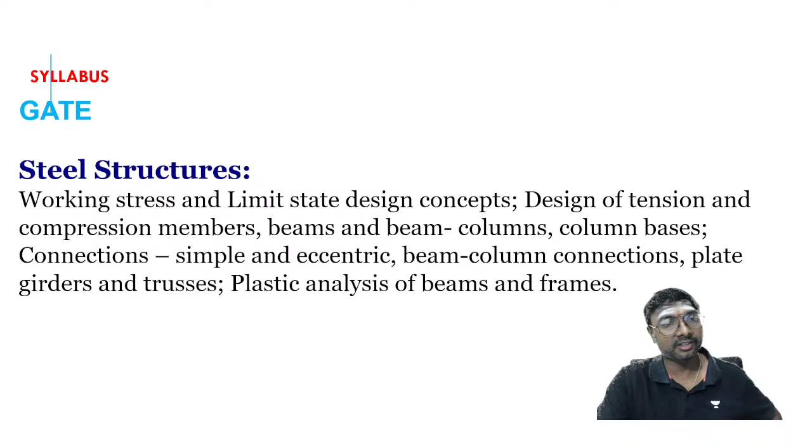This is the syllabus for GATE steel structures, this is the syllabus for ESE steel structures, and these are all the topics we will be discussing: basics of steel design, design of connections, concentric and eccentric, riveted, bolted and welded connections, type 1 and type 2 connections, tension members, compression members, built up columns, column bases, column splices, beams, plate girder design, gantry girder, roof truss. All these topics I'll be discussing here, but in a quick manner we'll be completing them.

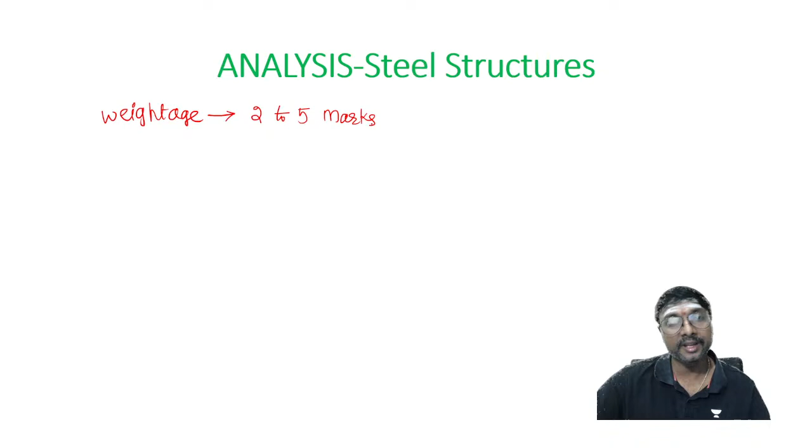So before we go further, what is the weightage of steel structures? If you observe, the minimum number of marks from steel structures in GATE till now is 2, and the highest is 5. So you will be getting 2 to 5 marks from steel structures in the GATE examination. Now ESE, what is that?

You will be getting 9 to 13 questions from ESE. Yes, 9 to 13 questions you will be getting in ESE. You can write: 9 to 13 questions you will be getting in ESE.

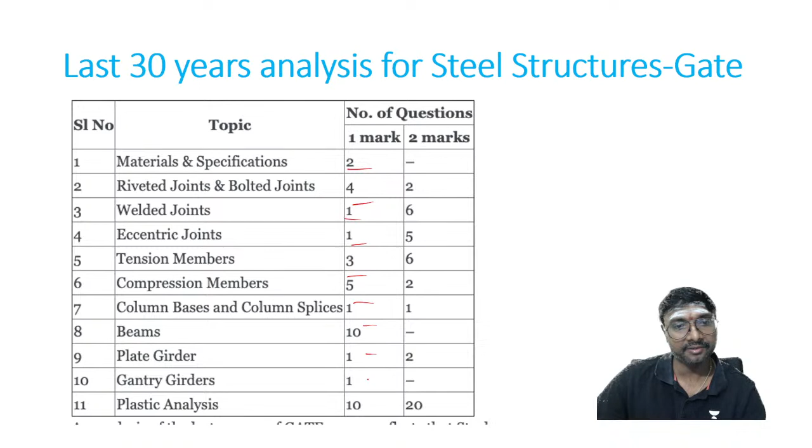So these are the distributions we are having - materials, riveted and bolted joints, welded connections, eccentric joints - these are the weightages if you observe, from each and every topic in the last 30 years of your GATE examination. Now coming to this, shall we start the first chapter?

So you can make notes of it, right? So that for quick revision point of view, these are useful. Whenever you are revising just before the examination, these notes will be useful - it's like short notes, useful as quick revision notes.

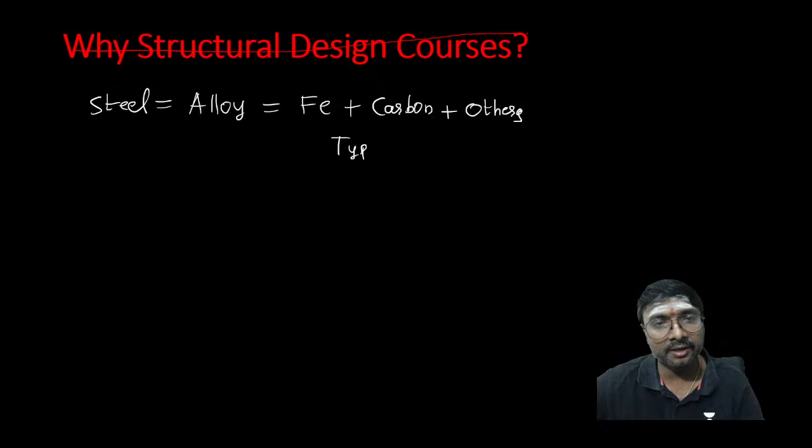First one is reinforcing steel. So what is the meaning of this reinforcing steel? Second one is structural steel.

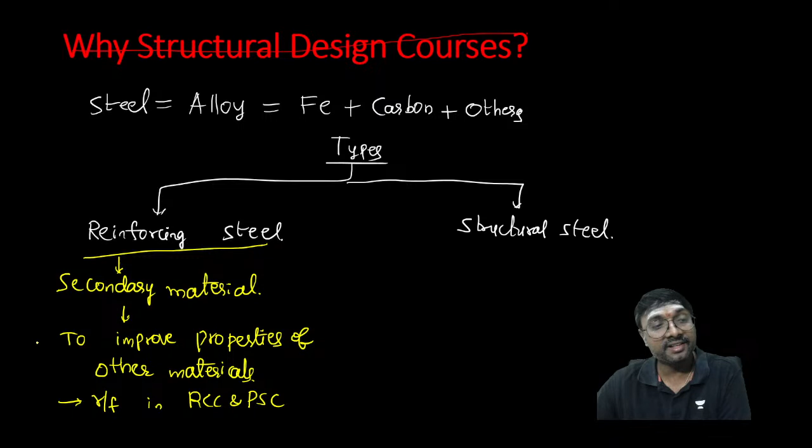In case of RCC and PSC, is steel the main material or is steel a secondary material? Steel is a secondary material, yes or no? Structural steel means - so there in RCC, concrete is the main material.

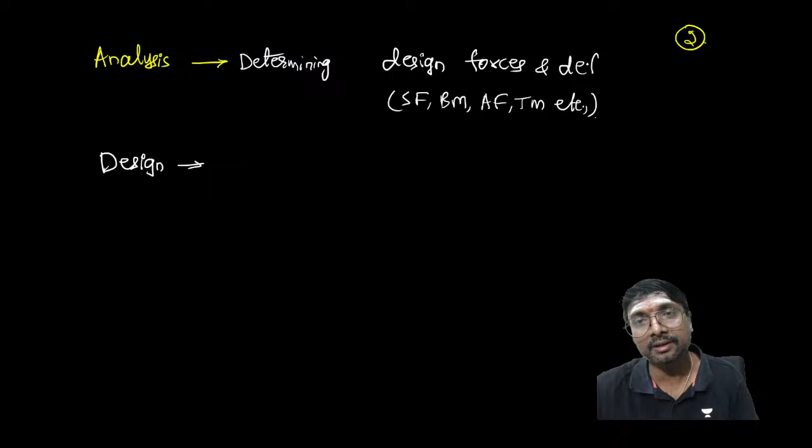Design forces क्या है? Analysis means whenever you are calculating shear force and also deflections - determining design forces and deformations. Which deformations? Deflection, rotation - all these are deformations only, and rotations are also the deformations only.

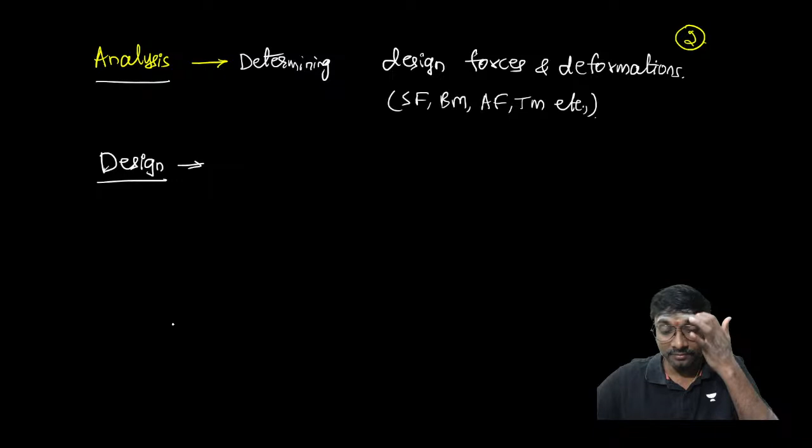Now what is the meaning of this design? Tell me, anyone? Analysis, you know, is calculation of this design forces, right? What is the meaning of this design then?

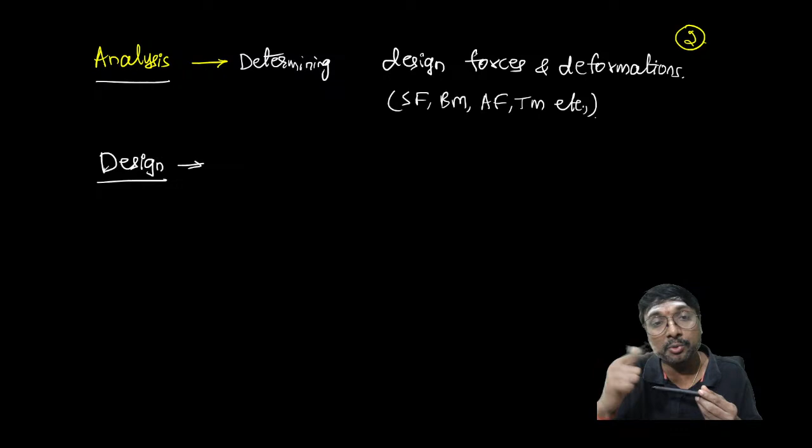So whenever you are applying a bending moment on this structure, it has to resist this bending moment. Which property will resist this bending moment? Material property will resist, and geometry property also will resist. So what is the meaning of this design, everyone?

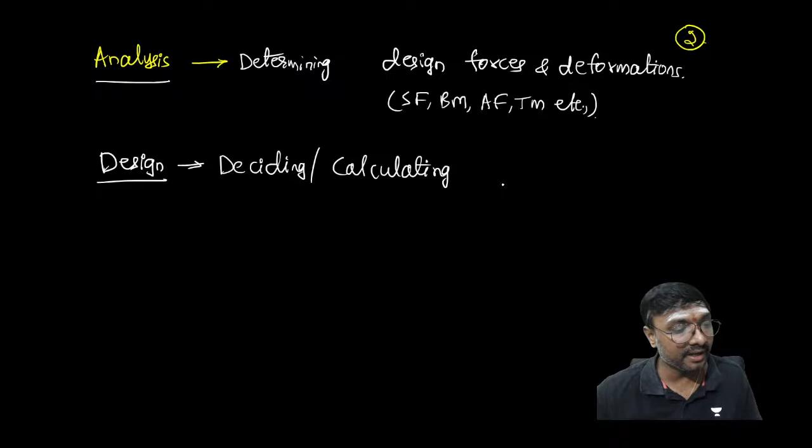Deciding, or calculating - deciding the material and geometry properties. Material properties we have to decide, and geometry properties also we have to decide. What is the width, what is the depth, what is the shape?

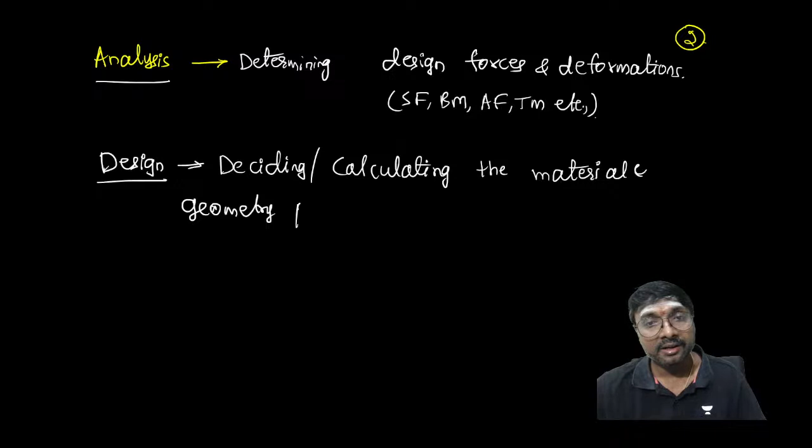Material properties for which purpose? What is the main purpose? To resist the design forces only - it is to resist the design forces only, if you just observe. Got it now? The difference between the analysis and the design, you understood everyone?

So means material grade - what is the meaning of this material grade? We have to decide. If it is RCC, M20, M30, like that. If it is steel, which type of steel we are deciding - FE 410 grade, FE 510, FE 500 grade, like that, FE 800, like that.

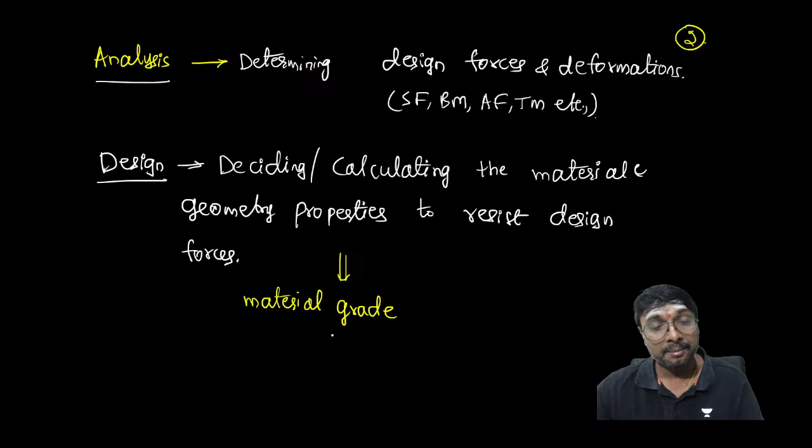Material grade plus what else will we be discussing? Shape of cross section also will decide now. Shape of cross section plus geometry - what is the meaning of this geometry? Dimensions - geometry is nothing but your dimensions. These are all, if you are deciding, that is called design.

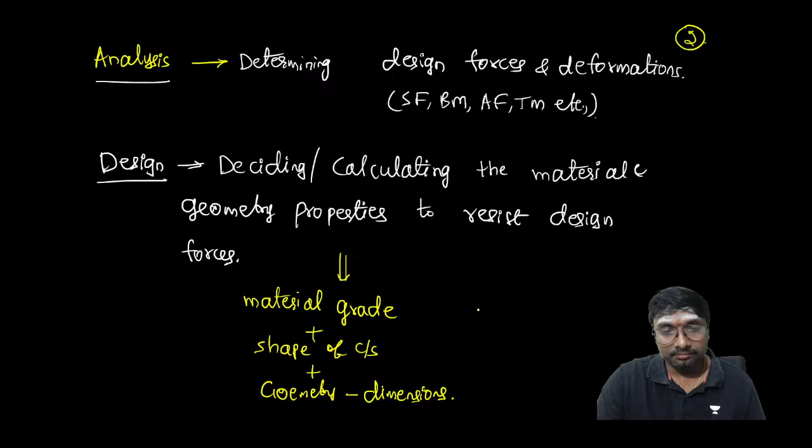Right, so now we'll be going on to this one. Generally, if you are representing the steel nomenclature, how will you represent it? This nomenclature is very, very important. Nomenclature means what? A representation. Suppose if it is a reinforcing steel...

Whenever it is a reinforcing steel, for example Fe250, what is the meaning of this Fe250? Tell me, what is that 250 telling? Here that 250 is telling - this is a yield stress. It is representing the yield or elastic strength.

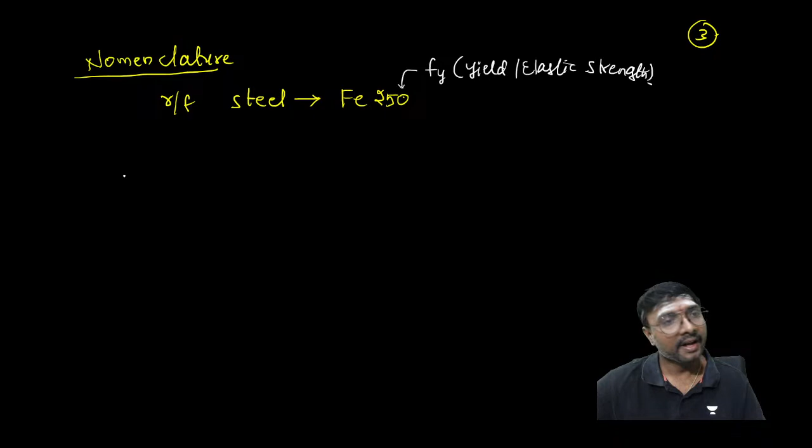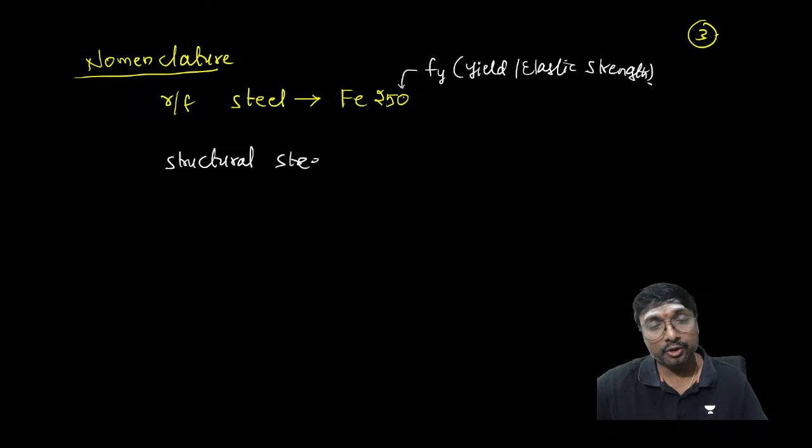Yield or elastic strength? Whenever it is structural steel, we are interested in this elastic steel or reinforcing steel? We should be studying about structural steel or reinforcing steel, whenever it is mentioned as Fe410. What is it considered when we mention it as Fe410, like Fe410 E250? E250 or E240 is mentioned like this. What can you understand from that? This 410 will be representing what?

Yield strength or ultimate strength? If 410 represents which one? This is ultimate strength Fu, ultimate tensile strength, UTS, right? And what is this 250 representing? That is representing Fy. Got it now? The nomenclature or representation of structural steel and reinforcing steel, is it clear to all of you?

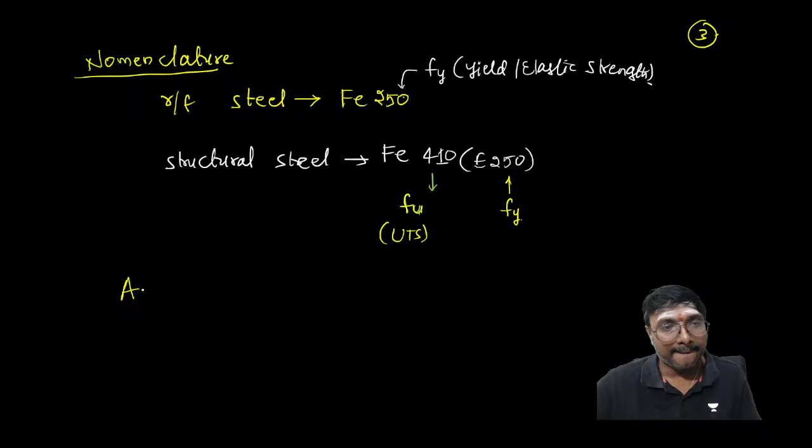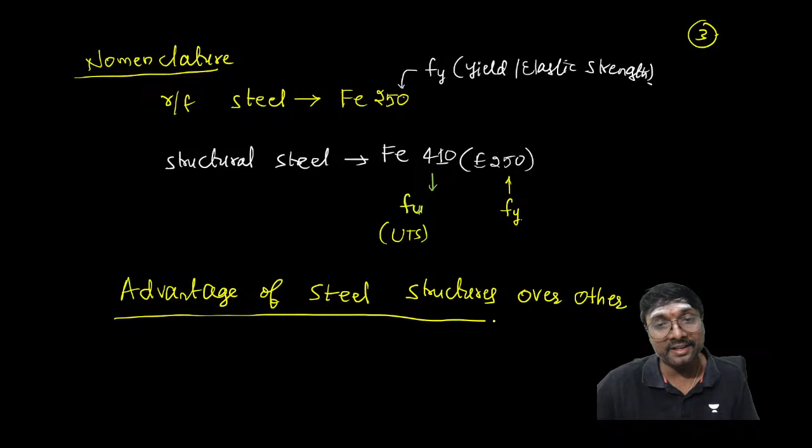Clear, all of you? No? Why do we have to go for steel structure first of all? The first and foremost advantage of steel structures over which one? Other, what is the meaning of this 'other'? You can say reinforced concrete structures and wooden structures and all these structures. Now if you consider, what are the main advantages? Anyone tell me, what is the first and foremost advantage of this?

Compared to concrete, these steel structures will show high strength or less strength? Compared to concrete, will steel structures show high strength or less strength? Very high strength they will show. If you consider these dimensions, for the same dimensions, who will show more strength? Steel structure will show more strength or concrete structure will show more strength?

E250 will be given, Fe410 E250 will be given. So in bracket E250, that is the nomenclature representation actually. Or directly what they will do is just simply represent it as Fe410 only. So then you have to take it as which one? This Fu, that Fu will be ultimate tensile strength. This is the actual nomenclature. If you observe the codal provisions, then you can understand this is the actual nomenclature you are having.

Got it? Now, first and foremost advantage is very high strength. What is the meaning of very high strength? Even for smaller dimension, you will be getting larger strength. Second advantage is more strength by weight ratio. So what is that strength by weight ratio? If you just observe, strength by weight is nothing but economy checking only, output by input checking. What is that output?

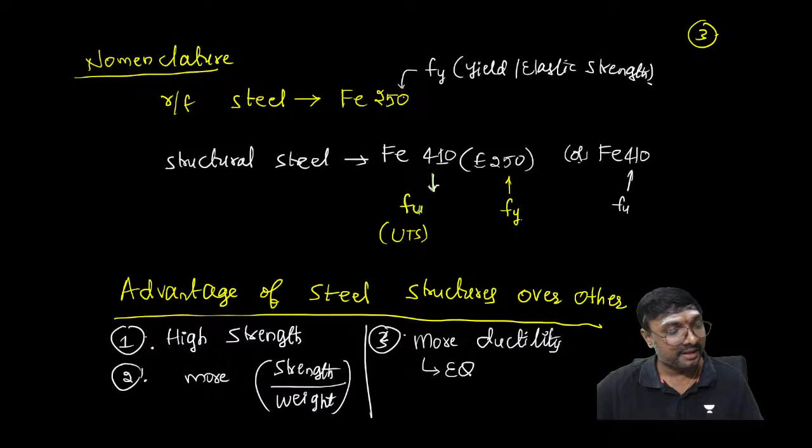So what is the next advantage of steel structure, everyone? I'll try to write here itself. So what are the other advantages? The next third advantage is what? More ductility will be there. What is the advantage of more ductility? In case of your earthquake, earthquake resistance, this ductility is a very important criteria.

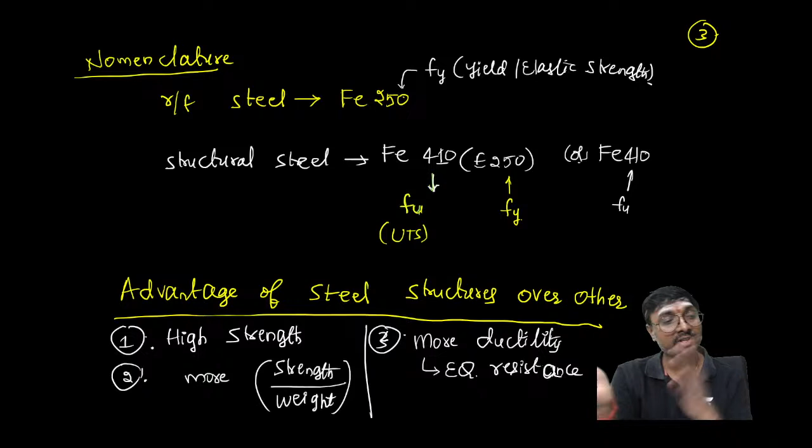More ductility you are having means more earthquake resistance will be available, because if structures are subjected to vibration like this, if they suddenly fail without much deformation like a brittle material, it is not advantageous, it is not required in case of earthquake. But during this vibration, it should not fail or break suddenly, it should show more amount of ductility, it should deform only. So whenever the earthquake starts, people can vacate from the structure easily, they will find some time.

Which one is better? Tell me now. Ductile material is better in case of earthquakes, or brittle material is better? Which one is better? Obviously, ductile material is better. Is it clear?

Now what is another advantage? Generally if you go for concrete construction, it will take a lot of time, almost 6 months. But steel is very ductile. Whenever it is a ductile material, what will happen? Steel will take less time of construction, right? Fast construction.

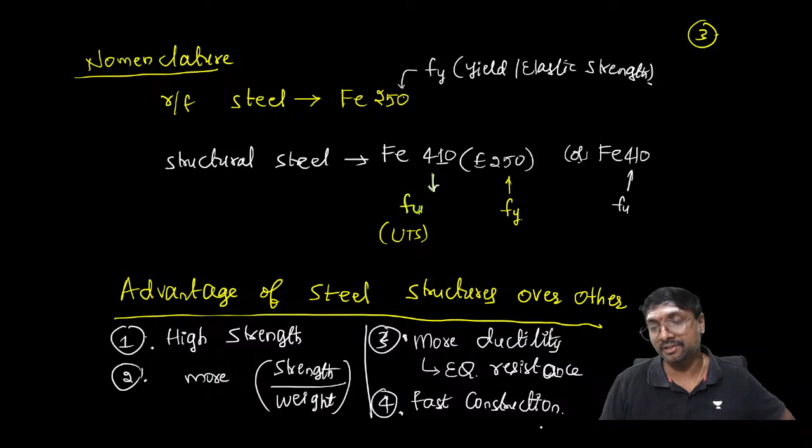Just within 1 week, within 1 month also we can complete the construction. Fast construction, right? So is it clear, everyone? These are the 4 points for advantages.

Is this clear, everyone? No. So next advantage, right? What is the next advantage?

Long life. If you just observe, what is the meaning of long life? Longer life means these steel structures will stay for more amount of time. Your children, your grandchildren also can stay in that, right? So what is the second point?

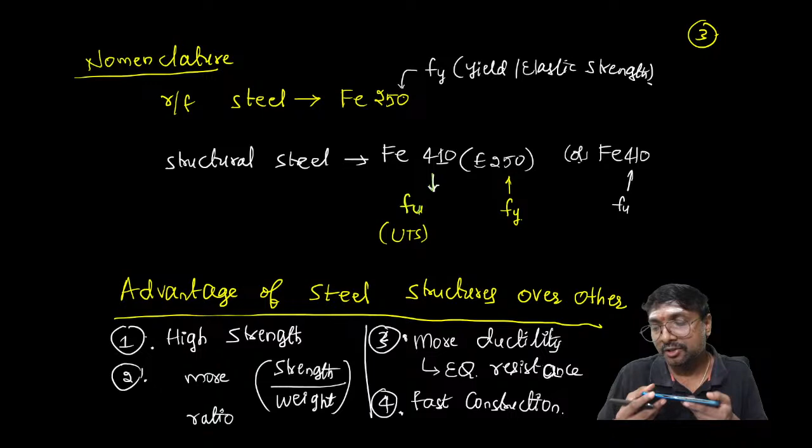More strength by weight ratio, right? Strength by weight ratio is nothing but, for lesser weight of the structure itself, you will get more strength. I told you, lesser weight means lesser dimensions. For lesser dimensions of the structure, lesser weight. For lesser weight itself, the load resisting capacity will be higher, right? Got it now, Shruti?

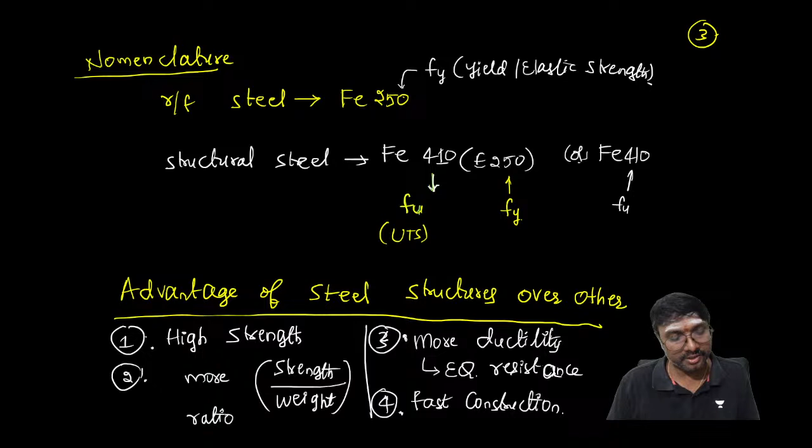Any other doubts anywhere in these points? Anyone else? Anyone having any other doubts? Clear now? Clear now or not? Right, okay, shall I move?

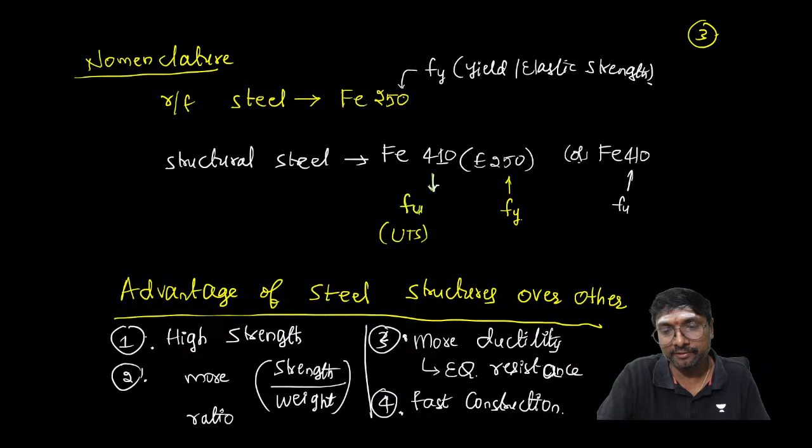Now sixth point. What is the sixth advantage? If you just observe, elasticity, right? More elasticity available. And more uniformity is also available, na? More elasticity and uniformity is available, right? What is the meaning of this elasticity?

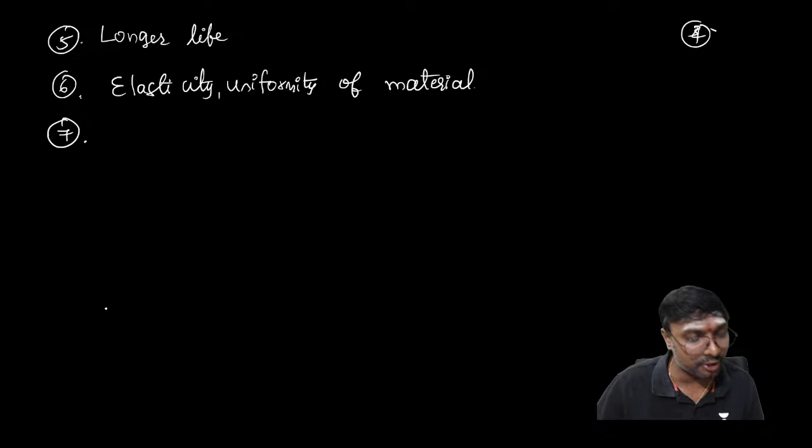What is the meaning of elasticity? It is a property of material by which it can regain the original shape and size after the removal of loads. Uniformity of material, right, means it will show homogeneous behavior, not non-homogeneous behavior. Now what is another advantage you can say?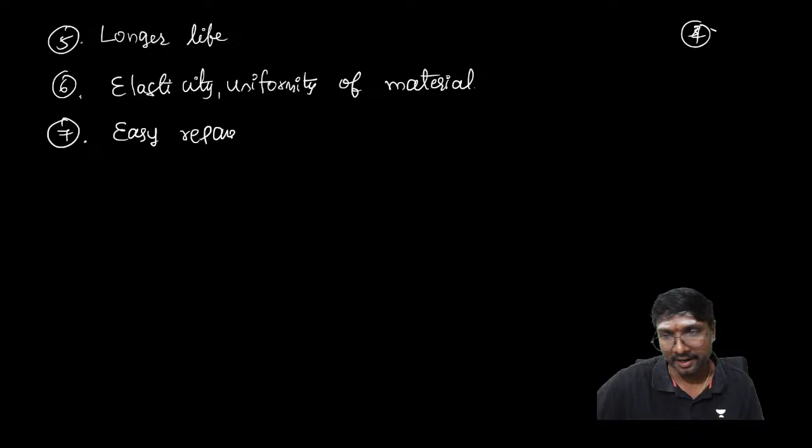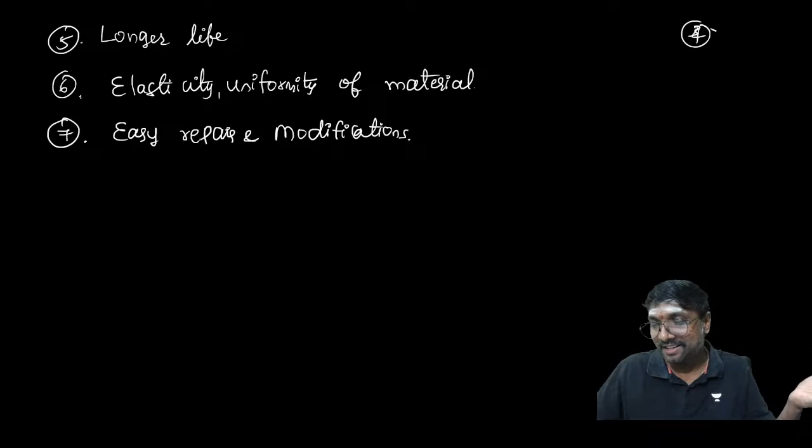Easy to repair, right? Easy repair and modifications. Suppose in case of concrete, a beam got damaged. Now if you wanted to replace that beam, is it possible easily? No.

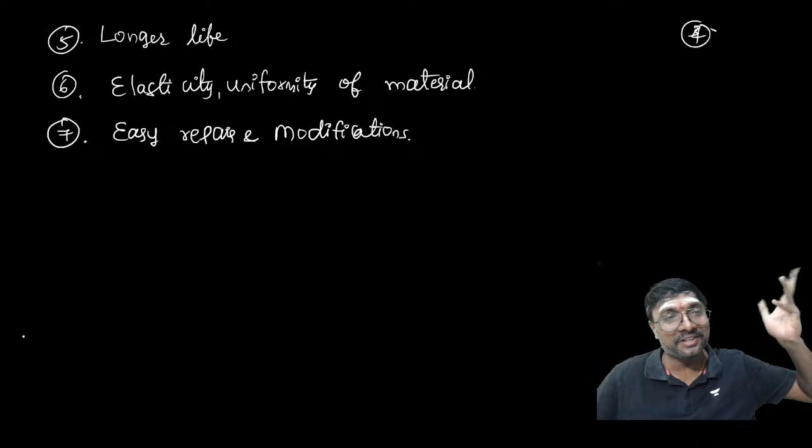But if it is a steel structure, what do we need to do? You provide a temporary support to the slab, remove the bolts, remove that entire I-section of the beam, and place a new I-section there, then again place the bolts. So is it easy to repair or not? It is very easy to repair, yes or no.

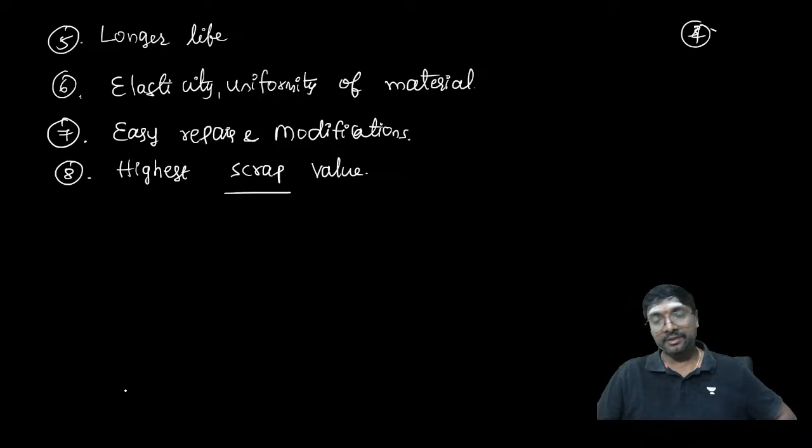Now what is it you can say? Highest scrap value. What is the meaning of this highest scrap value, all of you?

External retrofitting will be easy. And removing the entire beam and adding a new beam is also possible, yes or no. Removing the existing beam or column and adding a new member, you can replace it. If it is a riveted or welded connection, it may be little difficult, but that also you can do. But if it is bolted, easily you can replace. Got it now? What is the scrap value?

Once you use a structure for 20-30 years, then you demolish it. If it's steel, even after dismantling, you get considerable money back from selling the steel - that's the scrap value. But if it's concrete, will you get any money after dismantling or demolishing? No. So concrete materials become useless once the structure is demolished - no use for that at all.

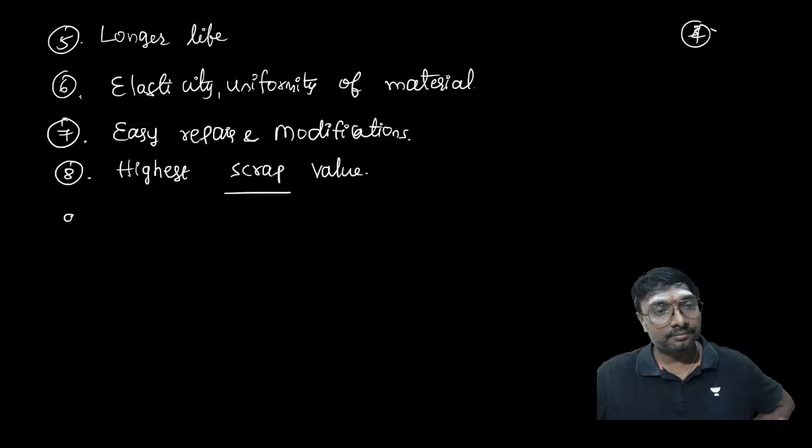Next point - highest quality, this is very important. Whenever you say M20 concrete, it has to show 28 days strength, this 20 MPa. But do we give a guarantee for that? No. That's why we apply a 1.5 factor of safety, and instead of FCK we use 0.67 FCK in design. But with steel, if you say FE250, FY equal to 250 MPa, it will almost show 250 MPa only. So you need not reduce FY. In concrete we reduce FCK to 0.67 FCK and apply partial safety factor on top, but for steel we apply the safety factor directly on FY. Because good quality is maintained, the expected strength equals the available strength.

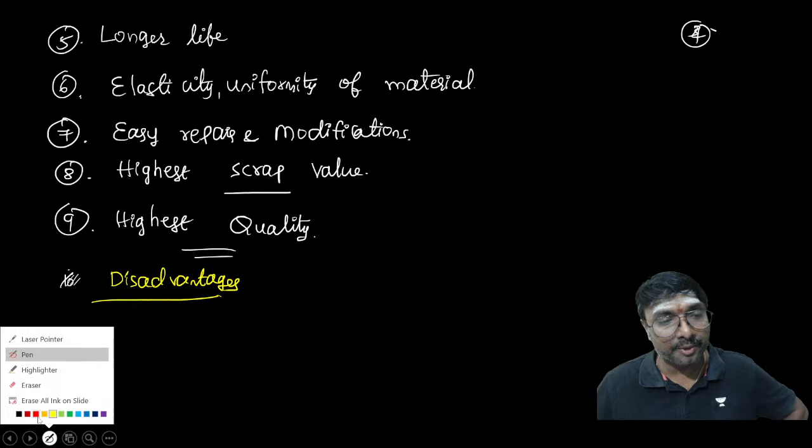So these are the various advantages we have with steel structures. But do you think only advantages exist for any structure, or are there disadvantages too? Disadvantages are also possible - so what are the disadvantages you can think of?

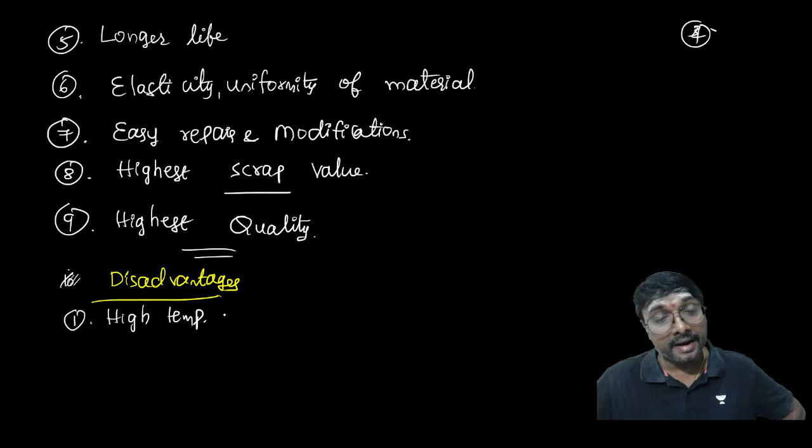High temperature susceptibility is one disadvantage. What's another? Corrosion is the biggest enemy of steel structures. So we need regular painting and maintenance, isn't it? To avoid temperature effects, we need fireproof treatment. To avoid corrosion, regular painting and maintenance activities are required.

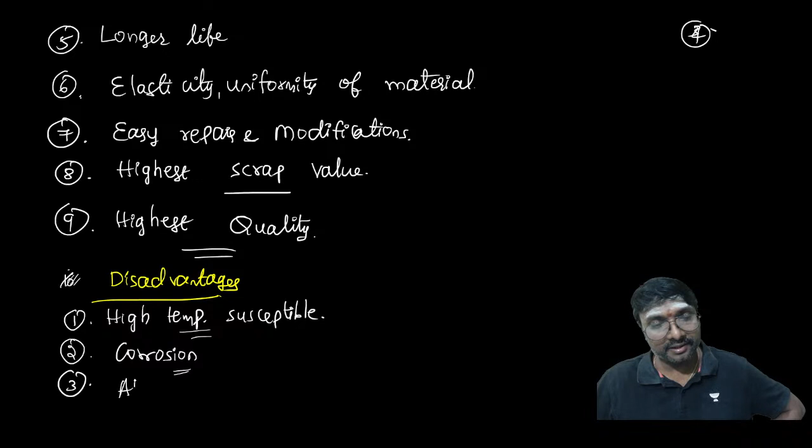Expansion of steel also happens. Then there's the issue of stress concentration - sudden change in stress. At places of stress concentration, if you observe, what's the possibility? It loses its ductility. Whenever it loses ductility, is that good or bad? It is bad.

Is it clear to everyone - the advantages and disadvantages of steel as structural members? Just note it down and tell me. Are you noting it? Note this and tell me.

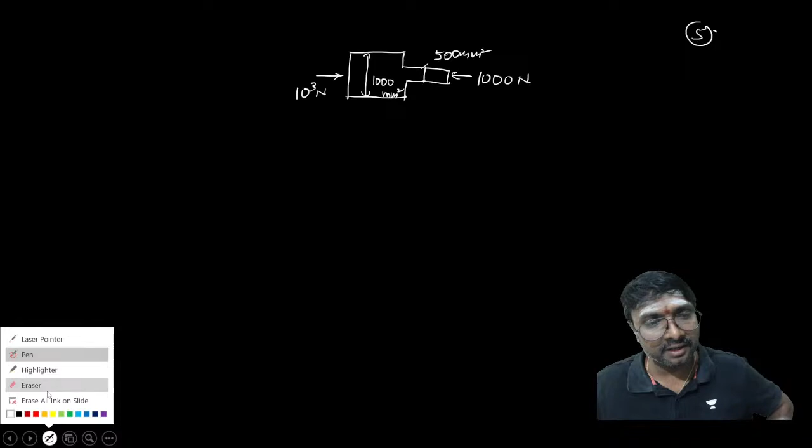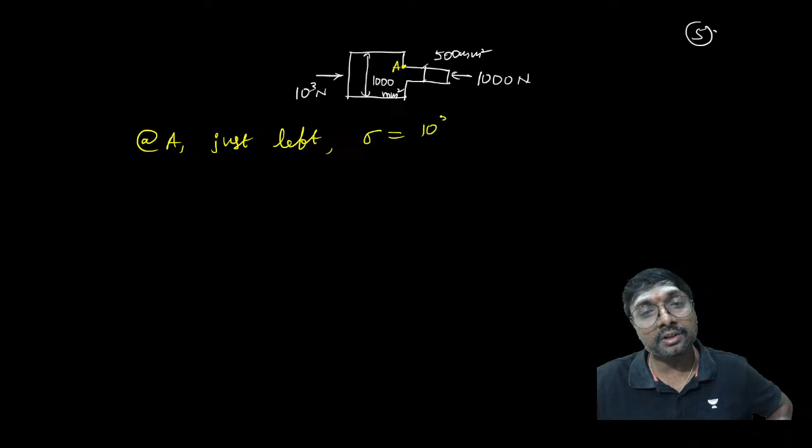Just left, what is the stress? This is your 1000 Newton by which area, 1000 millimeter square, right? So it comes to be 1 MPa. And at this A, just right side, if you observe, the stress will be equal to load 1000 divided by area of cross section 500, so that is your 2 MPa. So this sudden change in stress at a single point is called stress concentration, right?

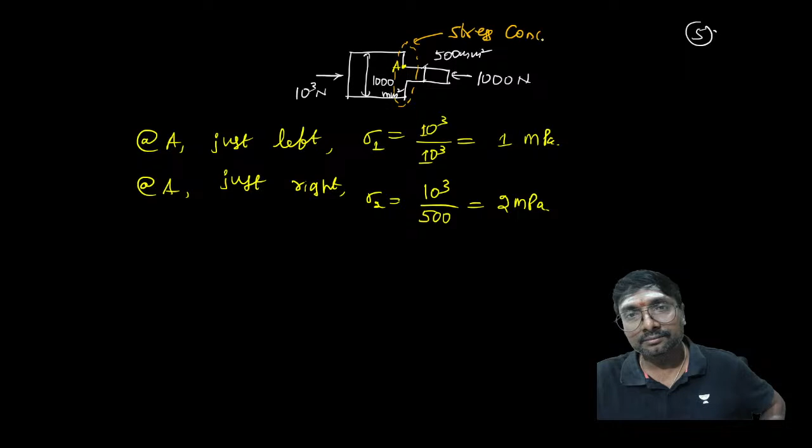Now got it everyone? What is the meaning of stress concentration? At this junction, where the cross sections are changing suddenly, what happens? Stress concentration, right? Got it?

Good morning Selim. So got it now everyone? Shruti, Chetan, understood the meaning of stress concentration? Iska matlab kya hai?

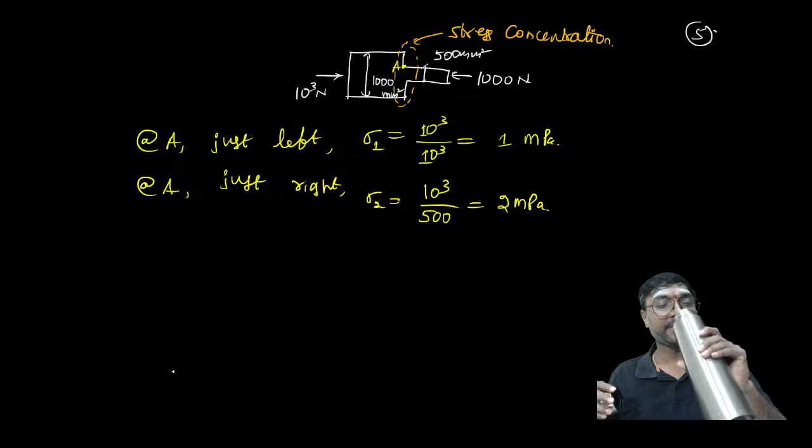And everyone, right? Got it? Right, clear enough? Now if you just observe,

What is that code we have to use for this design, for these standards and specifications?

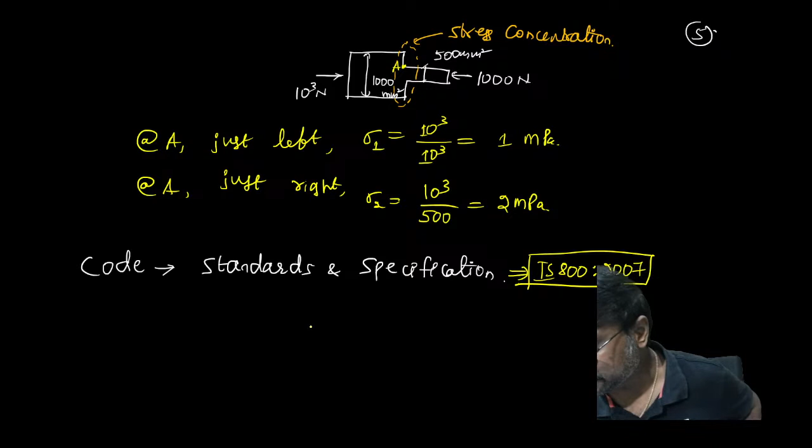Umang, you want me to wait at the previous one or here only? Previous slide you want me to wait, fourth slide? So what is the code for these standards and specifications? Same slide only? Okay, this slide only, I mean this slide only, no?

I'm not moving. So this is based on which one? This is a new code, na? This is a new code, you can say, right? New code or latest code. But old code, IS 800, what is it? 1987, right? What is that IS 800 1987 if you just observe? This was the old code, right?

Here old code was completely based on working stress method only, na? This new code, if you observe, it is working stress method as well as limit state method, right? Both are added here, na? Both are added, right, like that. Got it? So this is the second one.

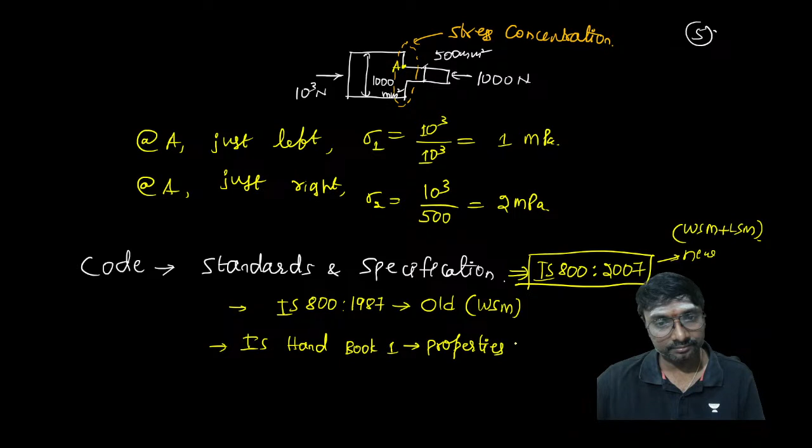And what is another one required? IS handbook number 1, right? Indian standard handbook number 1. So what is it telling if you observe? Properties of steel sections. That is nothing but your steel tables, na? IS handbook 1, right? What is the meaning of this IS handbook 1? You can say it is nothing but your steel tables, right? Steel tables use kiya hai kya nahi apne aapka BTech mein, BTech steel structures design mein steel tables use kiya

Hai kya nahi? You have used steel tables or not? Not, tell me. Yeah, steel table all, noted? Once noted, tell me all of you. Right, noted? Done, Umang?

So we should study about the types of structural steel, because structural steel is only important in case of steel design, or is reinforcing steel important? Structural steel is only mainly important in our steel designs, isn't it? So what are these types of structural steel if you just observe? The first and foremost one is standard quality steel.

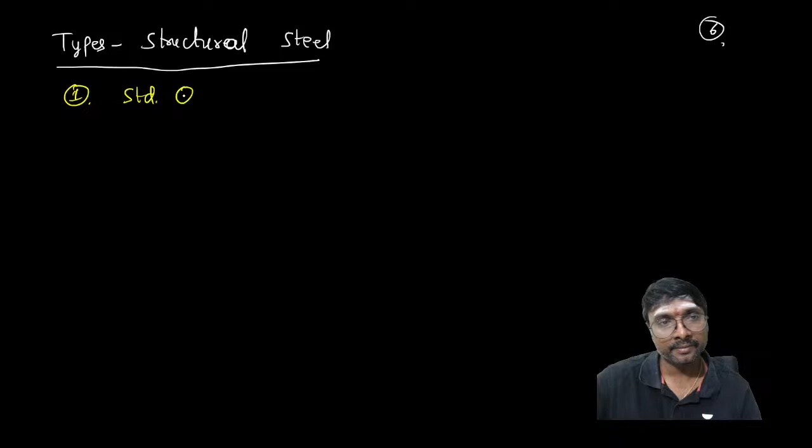What is it you can say all of you? Standard quality steel, right? SQS. It is according to which one, if you just observe? It is as per Indian Standard 226. So okay, I'll write the points regarding this, and then we'll go on to the other thing.

So standard quality steel, right? Indian Standard 226 is the code you have to follow for getting the properties of this. These code numbers also will be important. So what is that standard quality steel? It is the most commonly used one, a most common structural steel.

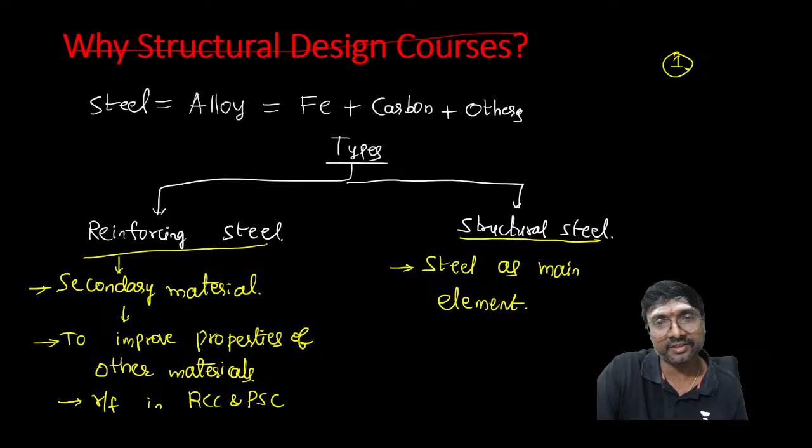SQS is nothing but not stainless steel. Don't think that SQS is stainless steel. What is the SS? You can say structural steel. Most common structural steel, most commonly used is this structural steel.

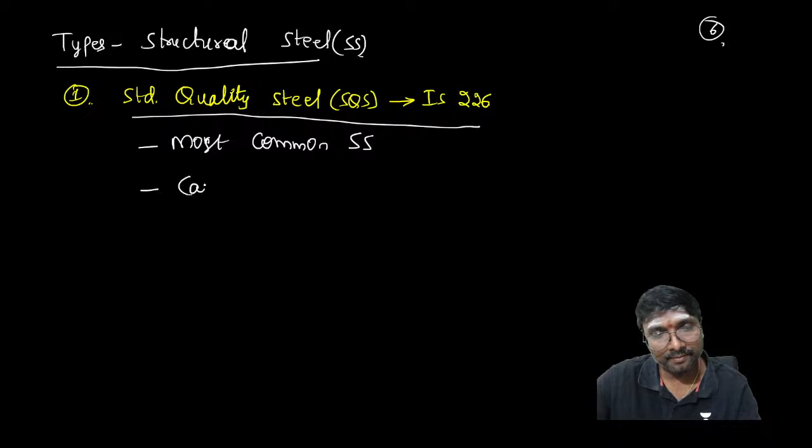Now what is the carbon content? Steel means it is having carbon, definitely. What is the carbon content in this? You can say carbon content is generally varying from 0.23 to 0.25 percentage. And what is the percentage elongation when you are conducting this tension test? After the tension test is over, what is the percentage elongation you will be getting for this? 23 percentage, you can say.

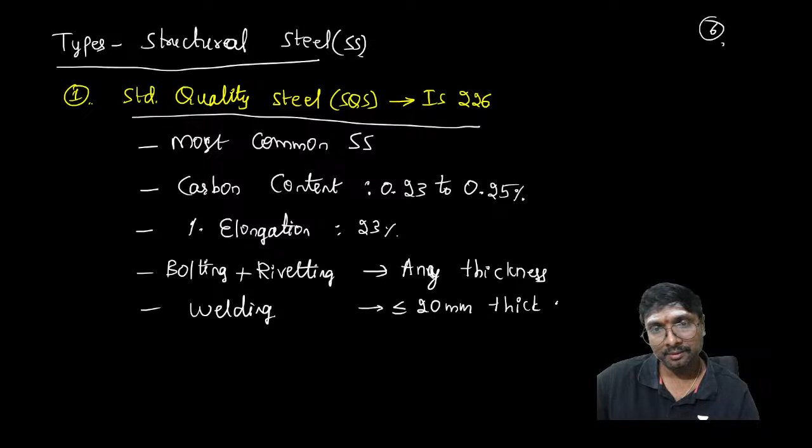And what you can do, bolting and riveting it can be done. The connection properties, if you just observe, bolting plus riveting, what you can do? Bolting plus riveting you can do for any thickness. But welding type of connection can be done for 20 mm, lesser than 20 mm thick members only, because if it is beyond that, the welding will not fit properly.

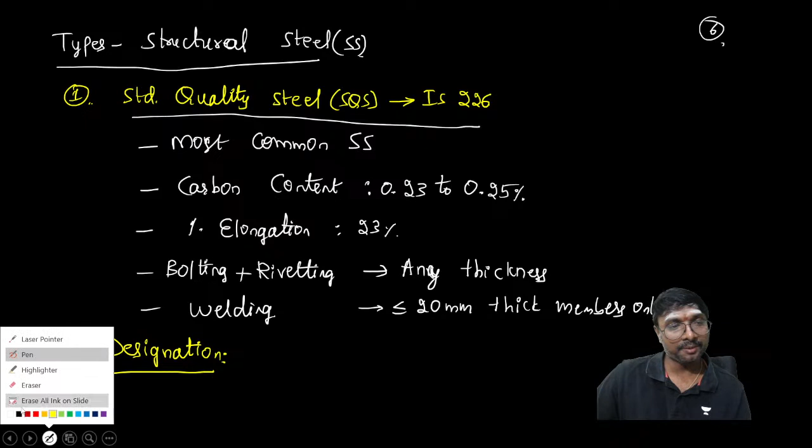And what is the designation? If you just observe, what is the designation, the nomenclature of this standard quality steel? How will it be represented? The designation means a notation, right? It is FE410 S. What is the meaning of this 410 here?

FE410 S, means 410 is what? FE410 S, that 'S' represents the standard quality steel. And what does that 410 represent? That 410 represents the ultimate strength FU. And sometimes they will be mentioning E250 also in brackets. If they are mentioning, okay, if not, no problem. FE410 S - so this 250 is representing the yield strength FY, it will be represented like that. Got it now?

This is your first type of the steel, structural standard quality steel. Note it and tell me everyone. We'll move on to the next one. Note this and tell me.

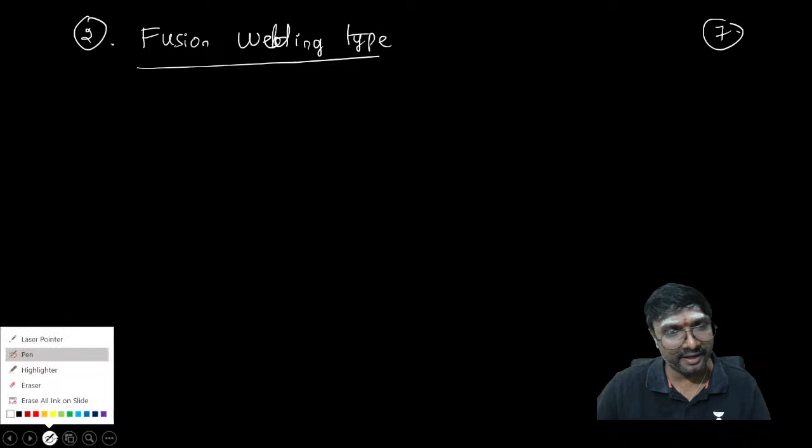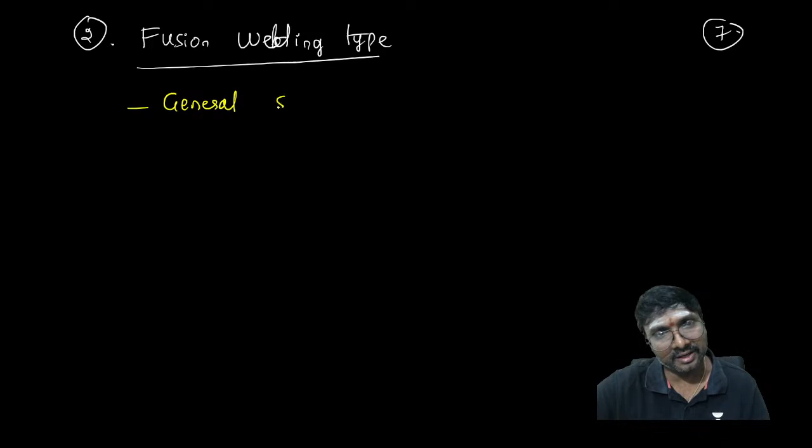What is the second type? You can say, if you just observe, fusion welding type. So previously that welding was not properly suitable. Now this is mainly for this welding. Fusion welding type. What is the fusion welding mainly suitable for? For general construction, general structures, and particularly where it is suitable - for general construction also it is suitable.

And what is the particular usage of this? If you just observe, it is particularly suitable for what, everyone? It is particularly suitable for structures with dynamic loads.

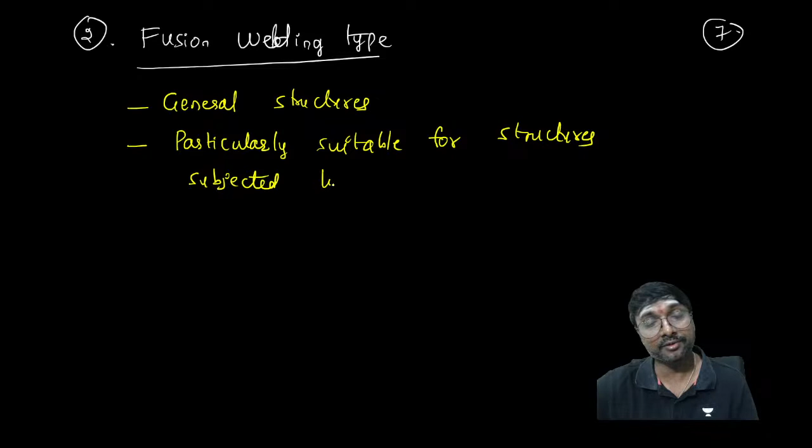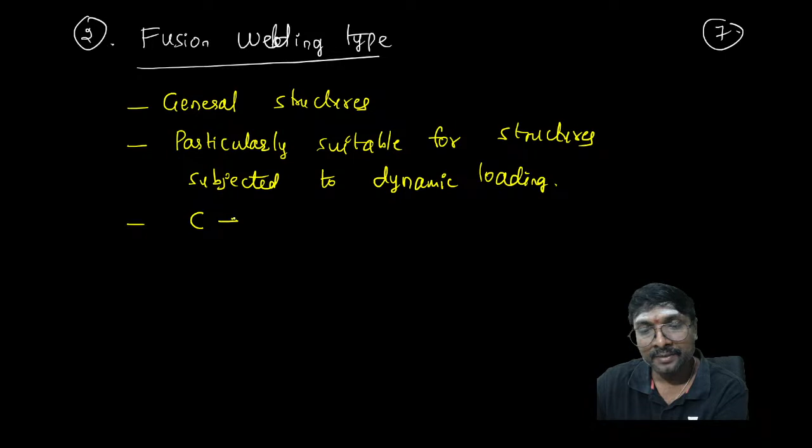Particularly suitable for structures subjected to which one? Structures subjected to dynamic loading. Dynamic loading means earthquake loading and wind load, right? So what is the carbon content you are having? The carbon content will be 0.22, this is 0.25 only.

Yes, welding is possible. In the first type, welding is possible in standard quality steel up to 20 millimeter thickness only. Welding, bolting and riveting you can do for any thickness, but welding is possible for members lesser than or equal to 20 millimeter thick only. Other members welding is not that much possible, it will not hold the members together.

Here carbon content is 0.2 to 0.25. And what is the percentage elongation? Strain percentage is nothing but your percentage elongation. This is also 23% only. And what is the designation you are having if you just observe?

What is the designation you can say, if you just observe? Fe410W, right? Fe410WA. So Fe410S means standard quality steel. W means welding quality steel. WA, WB and WC, right? What is the meaning of WA, WB and WC, everyone? Tell me.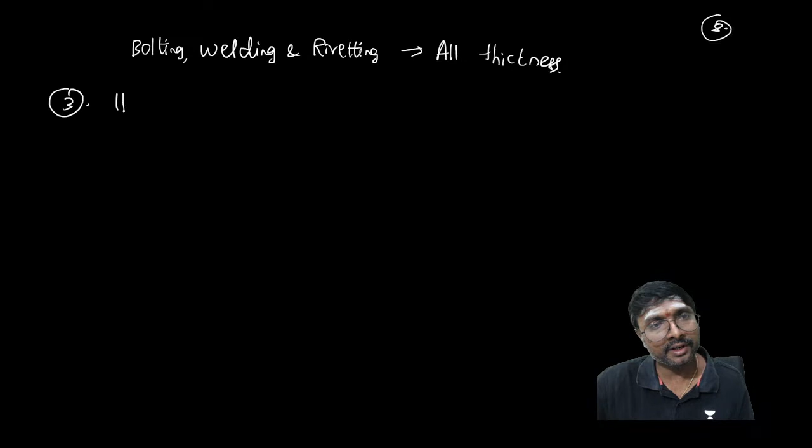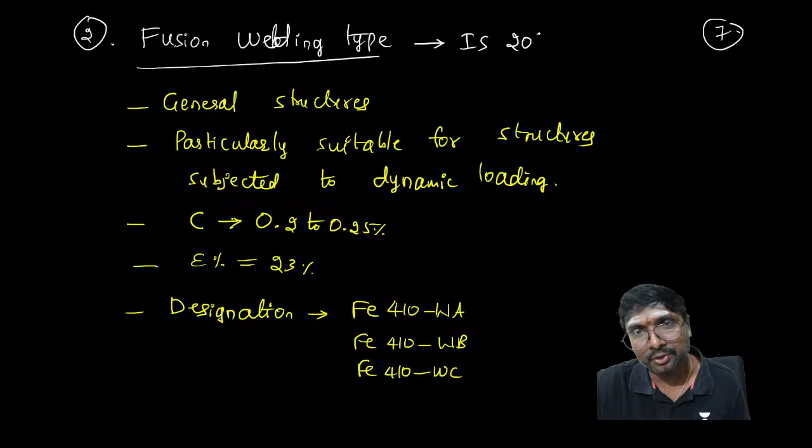Now next one, high tensile steel, HT. So this is according to which code? IS 961, Indian standard 961, right? Fusion welding quality steel is according to IS 2062. First one, standard quality steel is according to IS 226, right? Fusion welding quality steel is according to IS 2062.

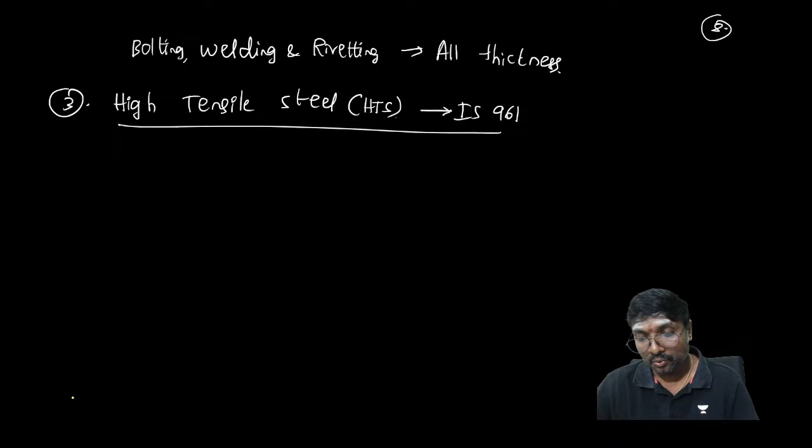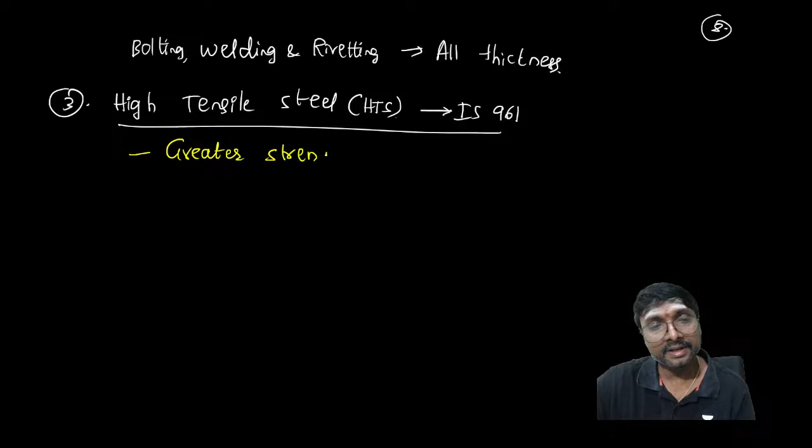And high tensile steel is according to IS 961. Okay, like that. The name itself is telling that it will be having greater strength or smaller strength. It is having greater strength. The main advantage is atmospheric corrosive resistance, which we are having, right?

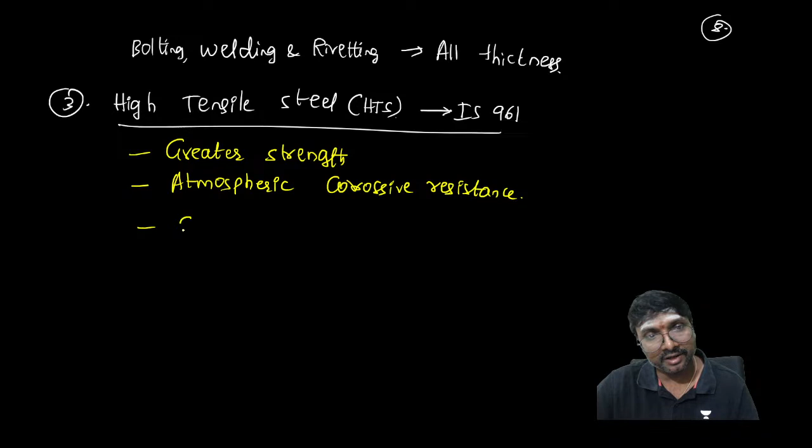Now tell me, what is the carbon content? 0.27 percentage. And what is the percentage elongation? As the carbon content is very much higher, can we get the same percentage elongation as 23 percentage? No, we may not be able to get this 23 percentage, right? We'll be getting 20 percentage elongation only, right?

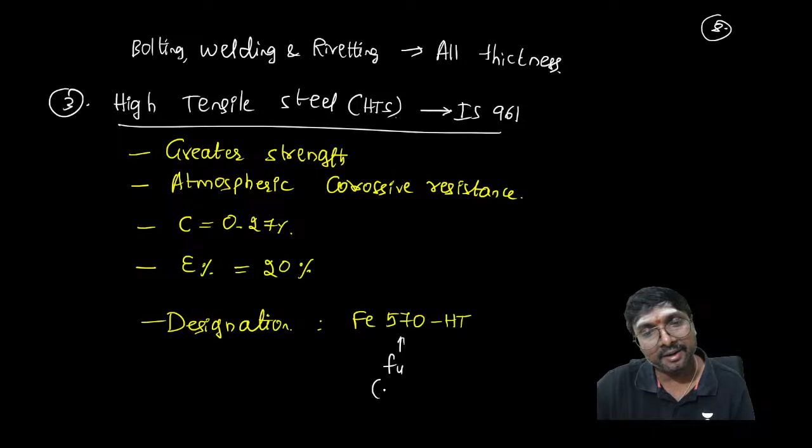And now what is the designation if you just observe? Let us say that is your Fe 570 HT. It is represented as 570 HT, means HT is high tensile steel, right? 570 will be representing the ultimate tensile strength FU. Got it now? Note and tell me.

So these are the different types of steels available, right? These are the different types of steels available, you can say. Got it now? Note and tell me.

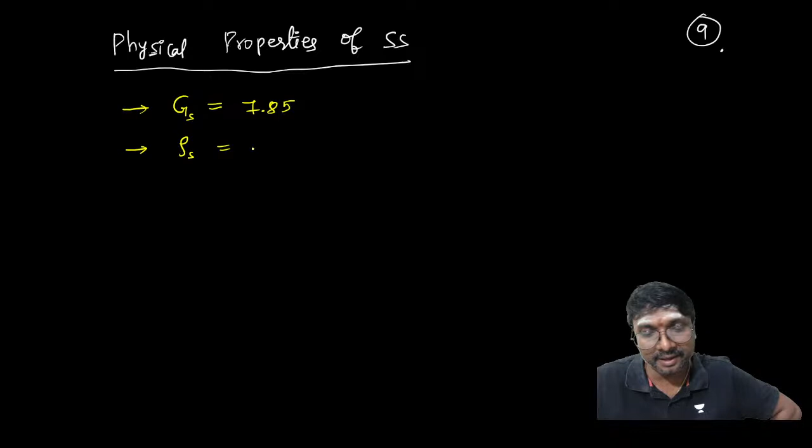Specific gravity of the steel is 7.85. What is that rho S? Is it mass density or weight density? You can say 7.85 means 7850 kg per meter cube. If you know the specific gravity, you can get this mass density.

Mass density noted. Elastic modulus of steel, how much do we take? 2 into 10 power 5 MPa. MPa is nothing but Newton per millimeter square. What is the Poisson's ratio?

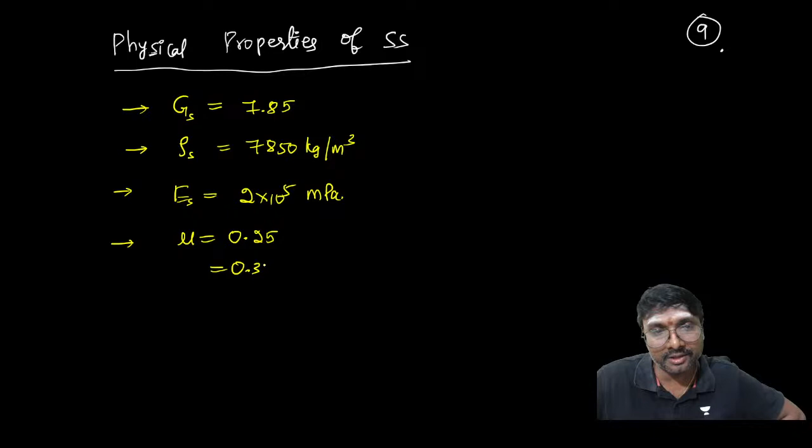Poisson's ratio is taken as 0.25 as per IS 800 1984 code, and 0.3 as per the latest IS 800 2007 code. As per IS 800 1984, 0.25 was the value to be taken. As per IS 800 2007 latest code, we have to take 0.3 as the value.

Now modulus of rigidity, 0.8 into 10 power 5. C equal to that, N equal to that, G - these are the symbols we give for modulus of rigidity. 0.8 into 10 power 5 as per IS 800 1984 code.

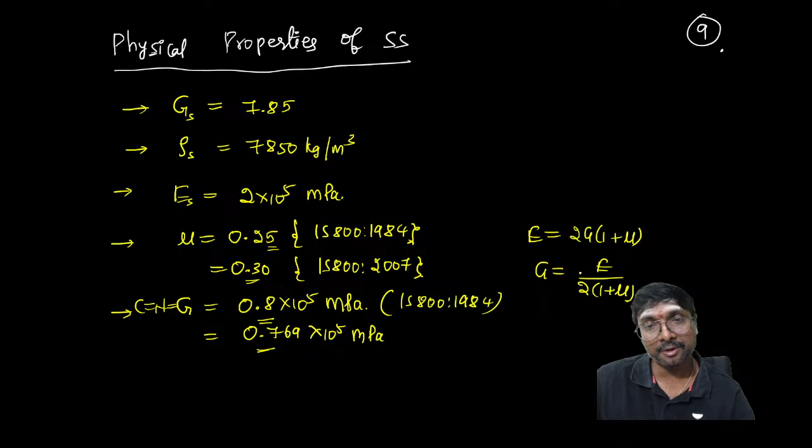So 0.769 into 10 power 5 MPa. Why is it changing? Because the Poisson's ratio is changing. When Poisson's ratio changes, the rigidity modulus also changes. E equal to 2G into 1 plus mu, so G equal to E by 2 into 1 plus mu. When Poisson's ratio increases, denominator increases, so G value decreases. That is why compared to the old code it is lesser.

This is as per IS 800 2007. Now what is another one? Coefficient of thermal expansion alpha equal to 12 into 10 power minus 6 per degree centigrade. These are all the physical properties of structural steel.

Old code is not discarded, I told you. If it is a case where working stress method is compulsory, we have to use the old code provisions only. What is that working stress method?

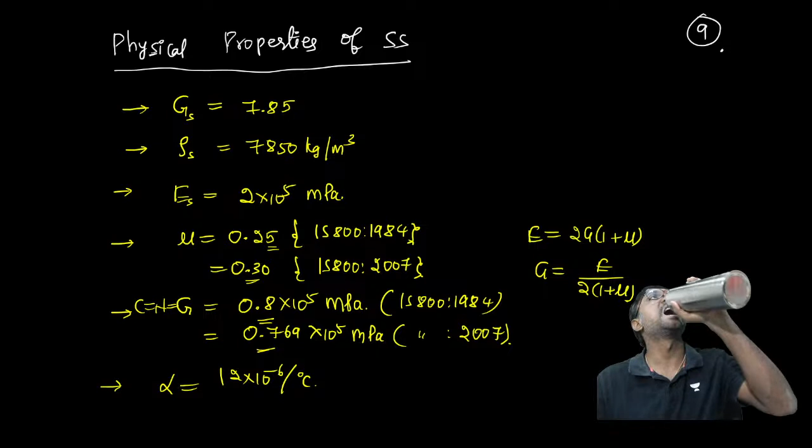Suppose it is a water tank - which one is important, serviceability or strength? For a water tank, serviceability is important, that leakage should not be there. So whenever serviceability is important, we have to go for working stress method only.

These are the physical properties of the structural steel. IS 800 2007 mainly insists us to use the limit state method only, but it does not restrict the usage of working stress method. Wherever working stress method comes to be more appropriate, then you go for that method.

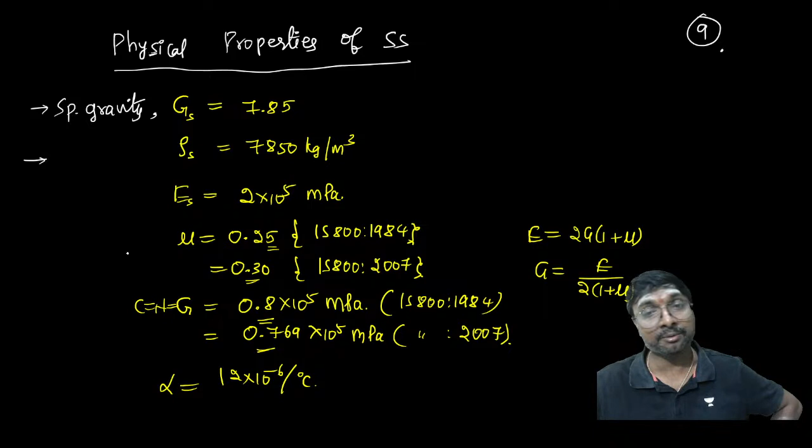This IS 800 2007 new code tells us to use the limit state method of design. But it also says that wherever it is suitable, use the working stress method also. Wherever limit state method will not serve the purpose and working stress method only serves, use the working stress method old code. That's why these are required.

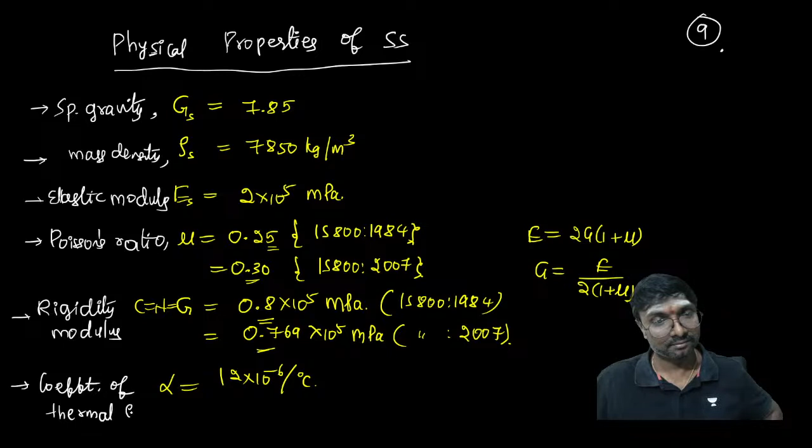For full serviceability, working stress method only will be good, you can say.

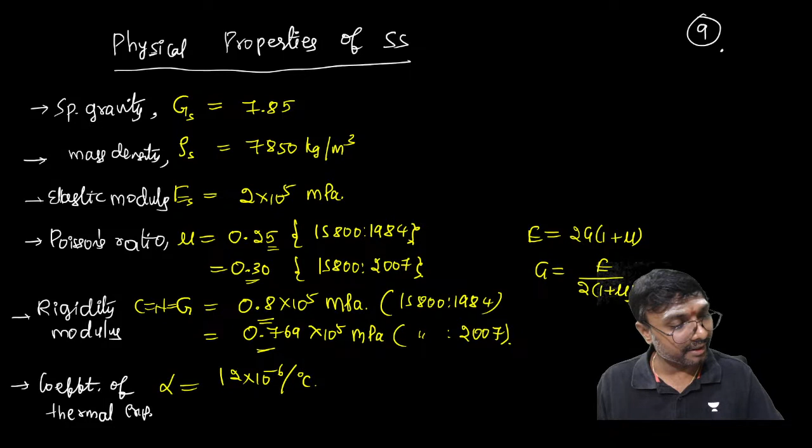Is it clear? Shall I close the session? Tomorrow we'll have this first chapter's remaining things - types of design, what is working stress, what is limit state, and what is the ultimate load method. These three designs, different types of sections, partial safety factor values, and then questions we'll see. Tomorrow the first chapter will get over.